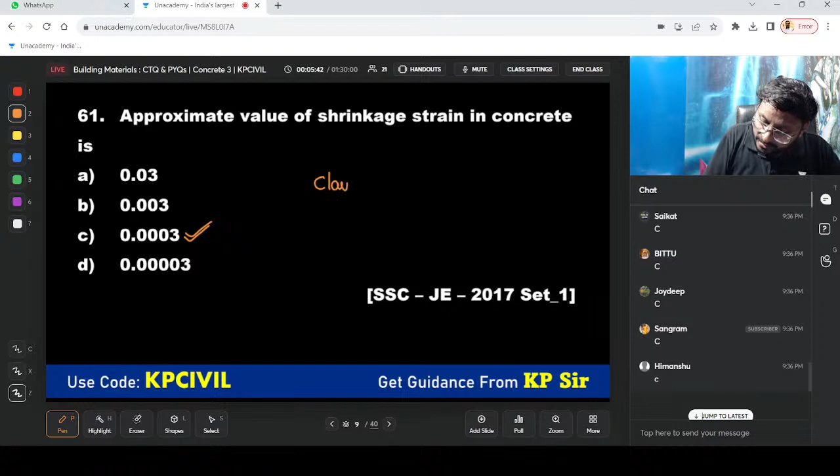So it is according to IS 456:2000, clause 6.2.4.1. If we don't have any data, then approximate value of shrinkage strain is 0.0003, 3 zeros after decimal and 3. When we don't have any test data, no other information, no test information, in such a case we take this as 0.0003. It is according to IS 456:2000, 6.2.4.1. Chalo.

Which one of the following properties of a plastic concrete is modified by air entraining agents? Kalyan garu, check once. Kalyan ji, Prashant, very good. Prashant, nice. Nalin, please go through this. Sanket garu, check karo aapka answer. Arey Jaideep, very good. Sangu bhai, kya ho gaya aapko bhi? All the above, no? All options are correct, we can say.

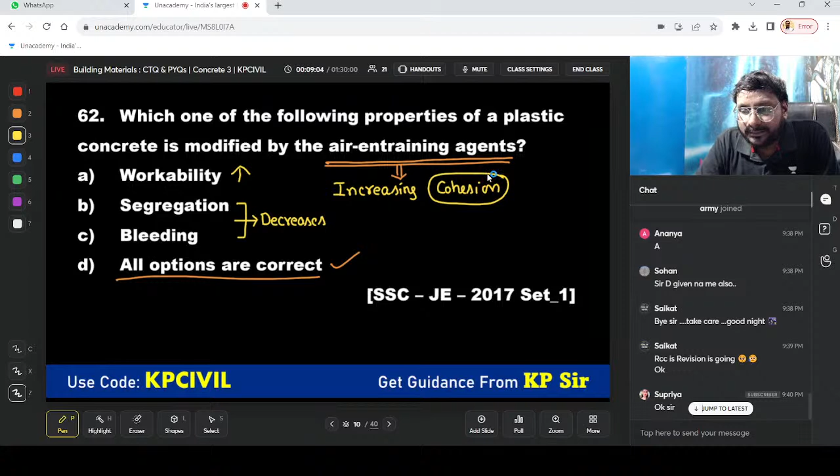A concrete in which dry coarse aggregates are first packed to have the...

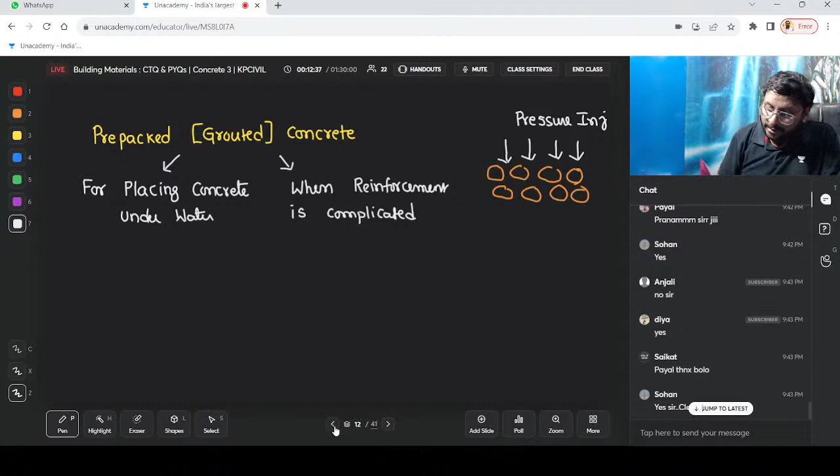Grouted concrete. Then what is coming next? What is vacuum concrete? Did you know vacuum concrete? Prashant? What happened, Messi? Bye bye.

So we will remove excess water from the concrete. The concrete in which excess water is removed by using mats, floats, vacuum foam, pads is called vacuum concrete. Yes, vacuum pressure, vacuum pads, vacuum mats are used. Excess water we can take out. That is called vacuum concrete.

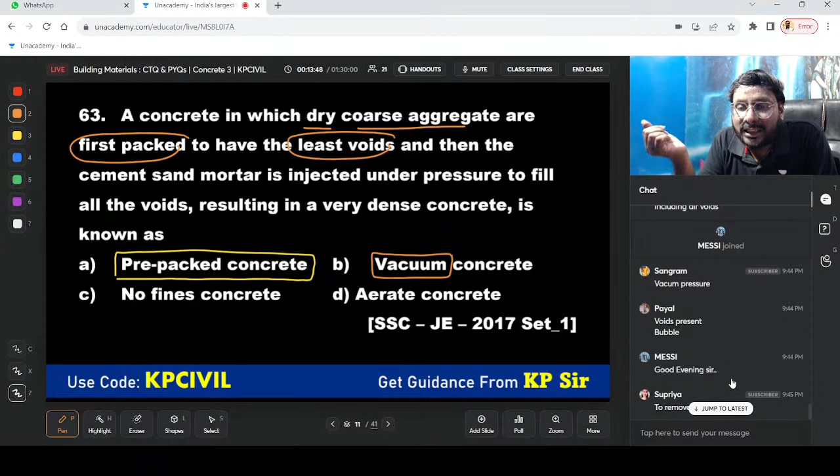Understand? Vacuum concrete is the concrete in which excess water is removed. Water will come out. How? Put vacuum mats, vacuum pads, and foams to improve the strength. To increase strength.

No fines concrete: concrete without fine aggregate. Very lightweight concrete. Not to remove voids, Supriya, please understand. In vacuum concrete, we remove excess water, not voids. And without fine aggregate, we call it no fines concrete.

Then aerated concrete, again lightweight. We can introduce air or gases into a slurry of PPC. That is aerated concrete. Do you understand?

So you know the four. Messi garu, you can say it. First, pre-packed concrete is grouted concrete: you are forcibly sending cement and sand mortar under pressure injection. Vacuum concrete, you are removing excess water. No fines concrete, without fine aggregate. Aerated concrete, you inject air.

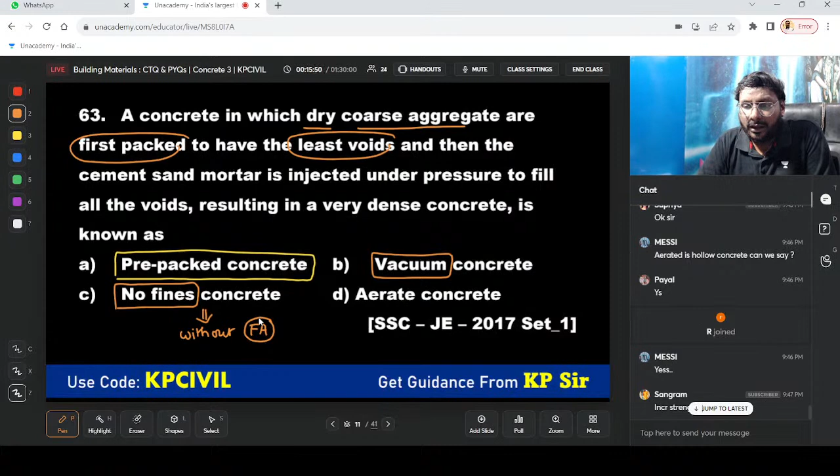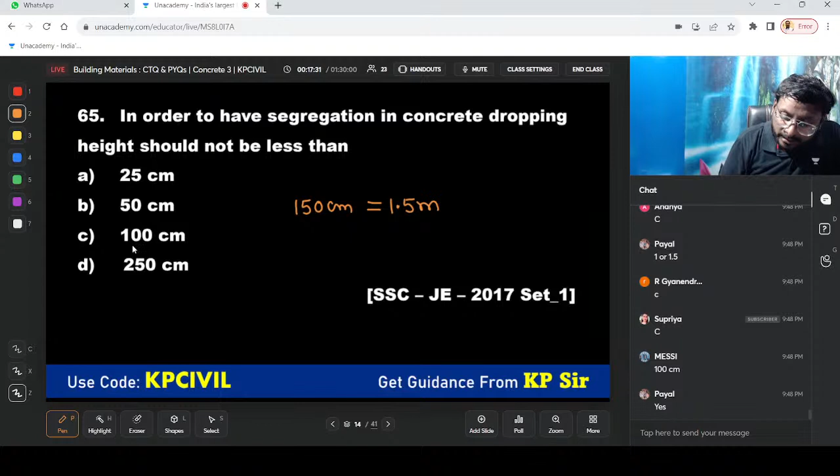Yes, actually it is 150 centimeter, 1.5 meter, but a nearby option we can select. I told in the beginning itself, Sangram.

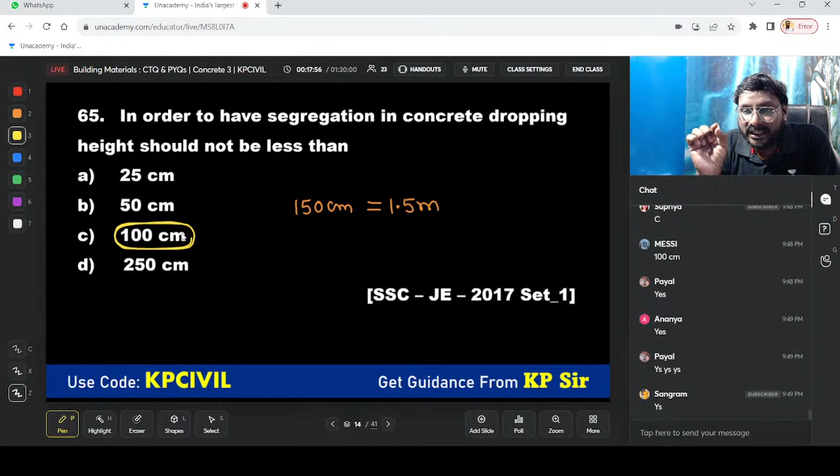That is very very important for us. So that is 100 centimeter which is nearby to 150 centimeter; that is 100 centimeter you can take.

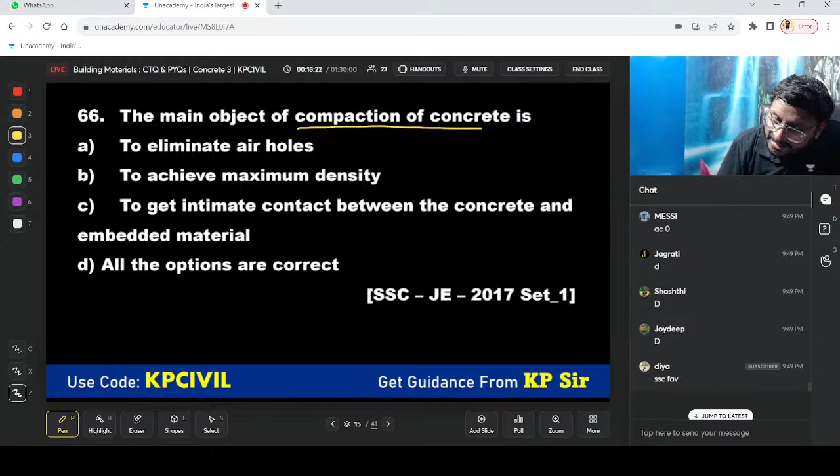What is the main objective of compaction of concrete? So compaction of concrete, we call it as self-compacting concrete, SCC. You know SCC? Self-compacting concrete eliminates air holes, achieves maximum density.

Intimate contact between concrete and embedded material. Concrete and embedded material, both must be in intimate contact. Option D. No, it is not valid, Messi garu. Not AC 0, not possible in concrete.

Chalo. So, what is the target benefit of self-compacting? Improve the constructability. If you are making self-compacting concrete, it improves the constructability and causes superior strength and durability. Constructability ज़्यादा हो जाएगा, strength बढ़ जाएगा, durability also along with strength. Generally, if you are increasing strength, there is a possibility to reduce durability. But it is not happening here. Strength increases, durability also increasing. So that is very important.

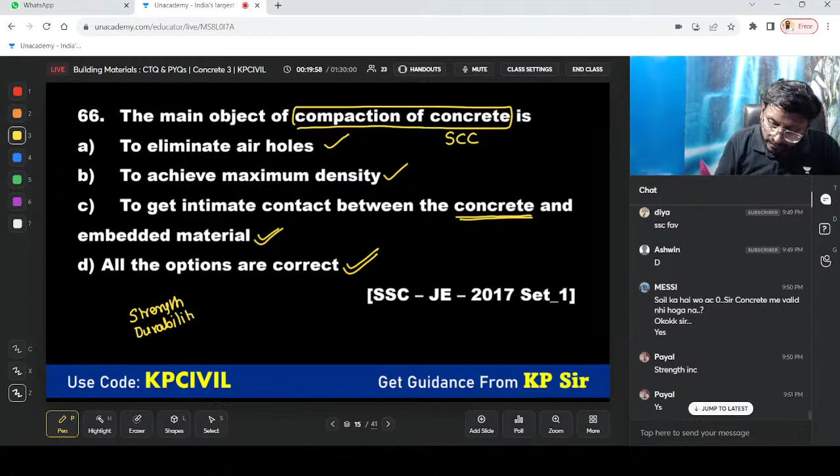Strength, durability, constructability. All are increasing because of self-compacting concrete.

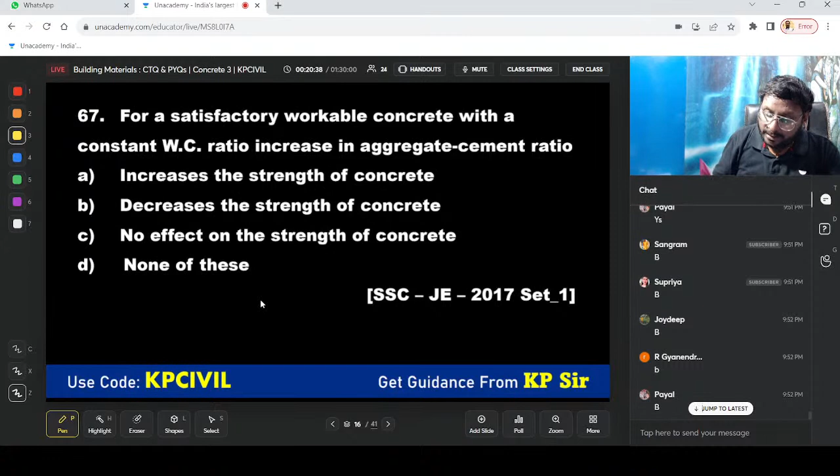For a satisfactory workable concrete with a constant water cement ratio, increase in aggregate cement ratio. Water cement ratio increases, strength decreases. Aggregate cement ratio increases, again strength decreases. Both possible. Yes, water cement ratio increases, strength decreases.

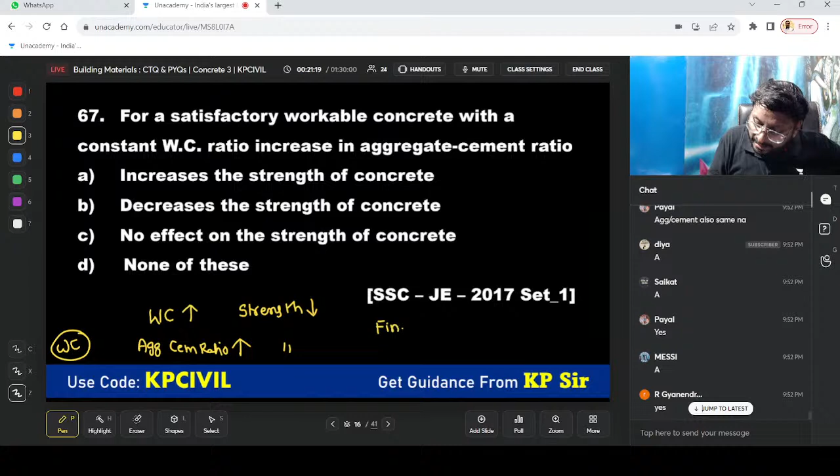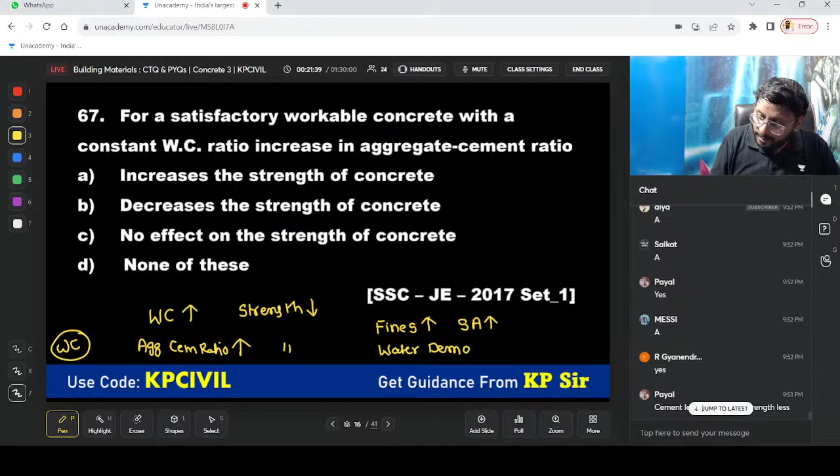Water cement ratio you kept constant. Aggregate cement ratio increase karo, ultimately strength decreases only. Why? What is the reason? When aggregate cement ratio increases, percentage of fines increases. When fines increase, surface area increases. When surface area increases, water demand increases. Please understand this.

Aggregate cement ratio increases, cement less, bonding less, strength less, that is okay. That is general words. That can be told by a mason. Hamali wala bolega, Payal garu. As a technical civil engineer, you can't say that. You can say aggregate cement ratio increases, percentage of fines increases, surface area increases, water demand increases. As water demand increases, ultimately strength decreases. Like that only you can say as a technical person. Don't say like a mason.

Chalo beta. Understand? Kalyan garu, Madhuri. Chalo, we'll move on, guys. This is we know already.

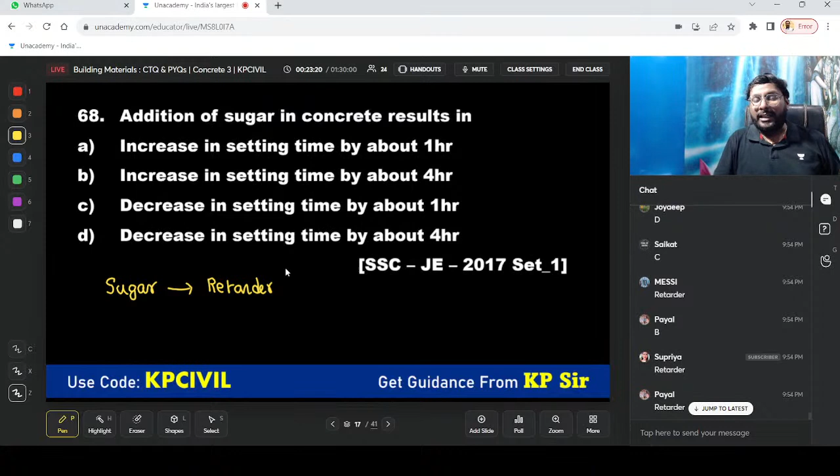Addition of sugar in concrete results in? Concrete में sugar add होने के बाद क्या हो जाएगा? So we know sugar is a retarder. It retards the chemical reaction, hydration of cement. So it increases setting time. Retarder, delay reaction.

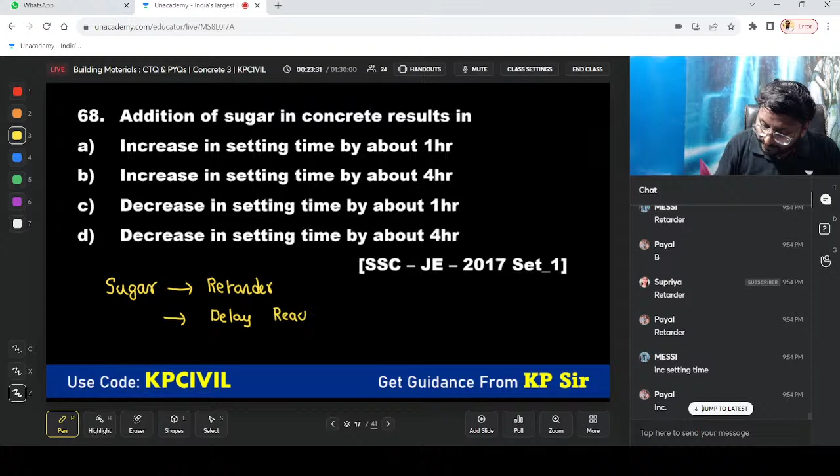So setting time increases. But how many hours does setting time increase? About 4 hours.

What happened, Joydeep garu? That is for you only. I have written that. It is not A, it is B. 4 hours increases. Bhaskar, Prashant Kumar, technical blogger. 4 hours increases. Chalo.

Sugar is a retarder. Retards the chemical reaction. Rate of chemical reaction falls down. Delays the reaction rate. Setting time increases. ये बताओ.

Same, Mantosh garu also saying, Payal. Mantosh also saying same. अरे क्या हो गया?

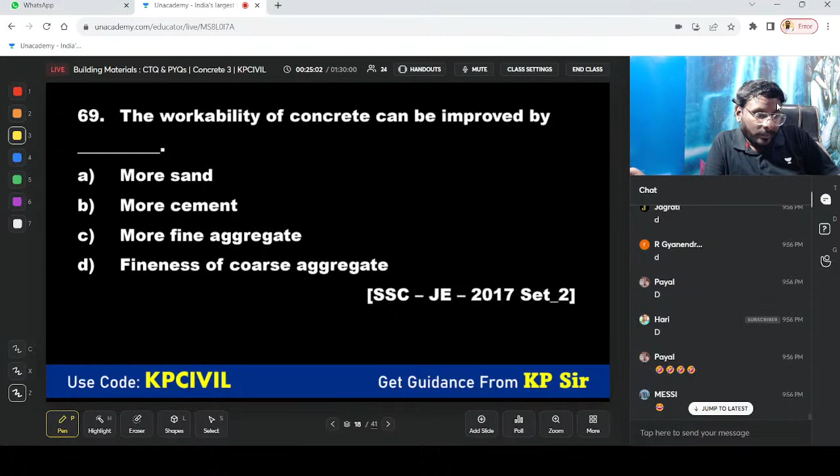Workability of concrete can be improved by? So it is not about cement. Please understand first, you are answering the question related to concrete. How many of you know this? Workability of concrete, not for cement.

So why not more cement? Please tell me. With increase of cement, will concrete workability not increase? Tell me, guys. What happens if I say workability of concrete is improved by more cement?

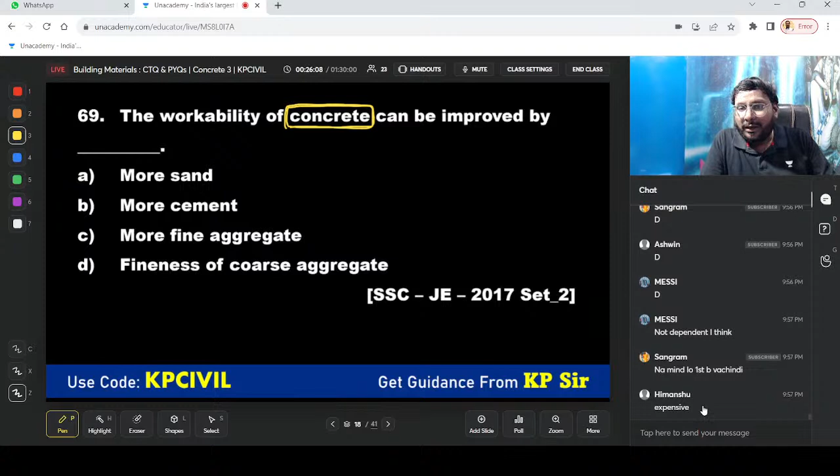What is workability? Workability is the ease with which it is working. The ease of working. Yes. No, we are not talking about cost, Himanshu. Ease to work improve हो जाएगा ना हो जाएगा, बस ये बताओ. Only you tell me that. We are not worrying about cost. So more cement, ease of working will be more. Then more cement only. We are not at all talking about the remaining properties. So workability, ease of working, will be more possible if you take more cement.

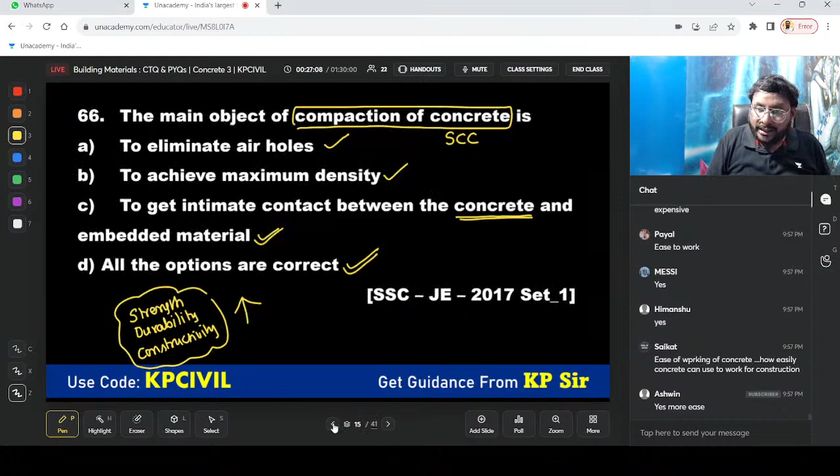If fineness is increasing, please understand. Fineness of coarse aggregate is increasing. You do understand that property. Fineness of coarse aggregate increases, surface area increases, water demand increases, it becomes more slurry. Please understand, we have written it already here. Fines increase, surface area increases, water demand increases, more water is taken. If it takes more water, it will become more slurry, na? Understand that point. So that is why we are saying more cement.

Strength of concrete increases with... Concrete strength.

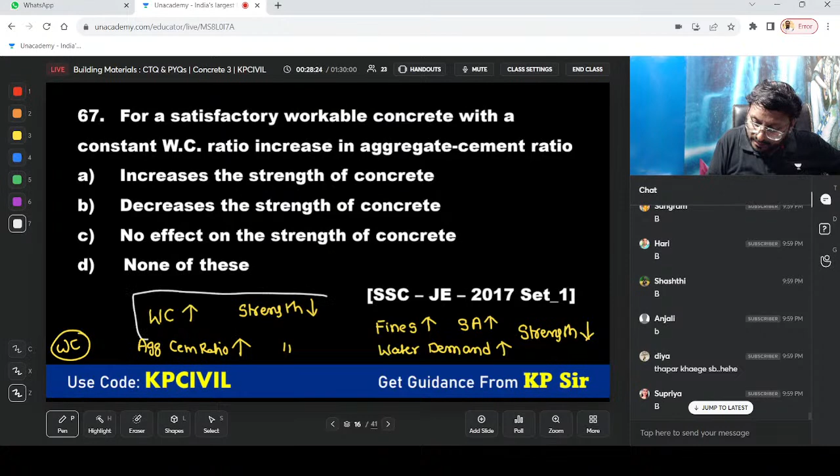Water cement ratio increases. What happened to strength? Strength decreases. Just now written ना.

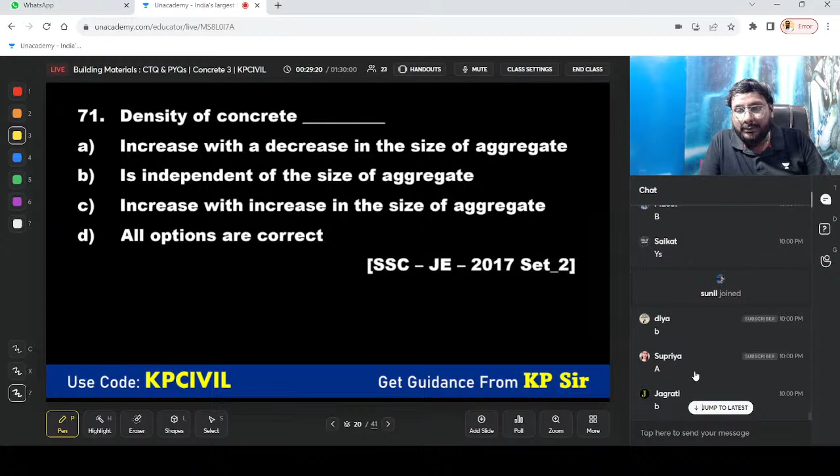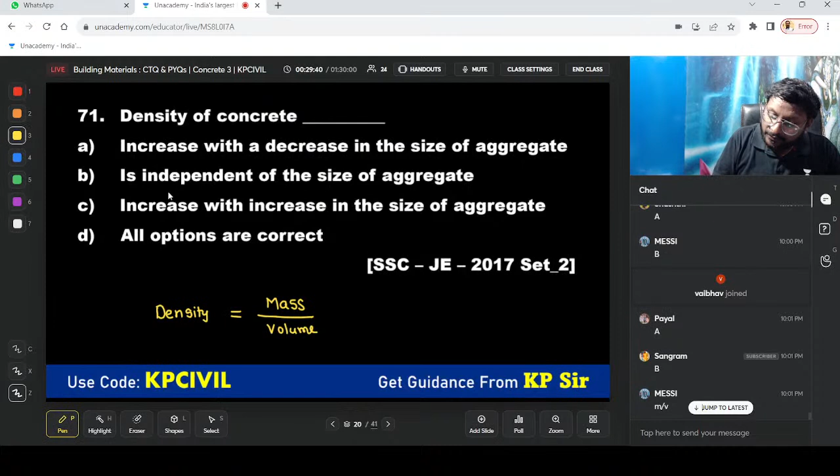Density is equal to, this is a simple relation na? Mass by volume. Size of aggregate increased, volume increased, na? Sangu bhai, size of aggregate increased, volume increased. Size of aggregate decreased, volume decreased. So density is inversely proportional to volume. Size we will consider in terms of volume. So density increases with a decrease in size of aggregate. Small things and known things. Everyone knows this formula.

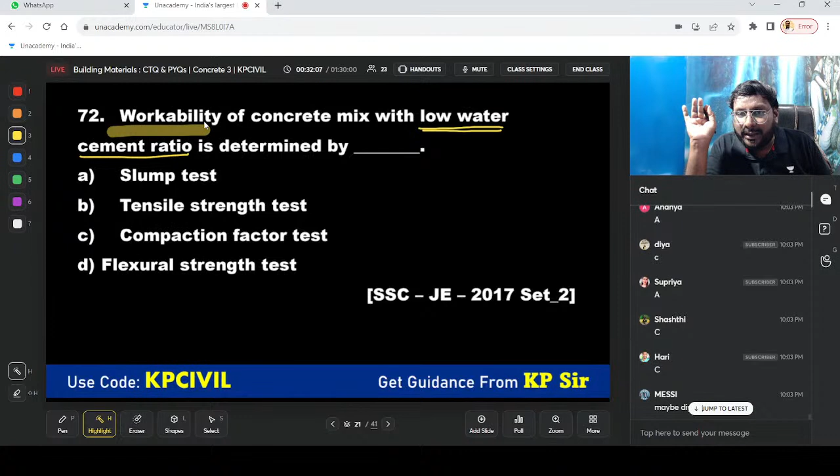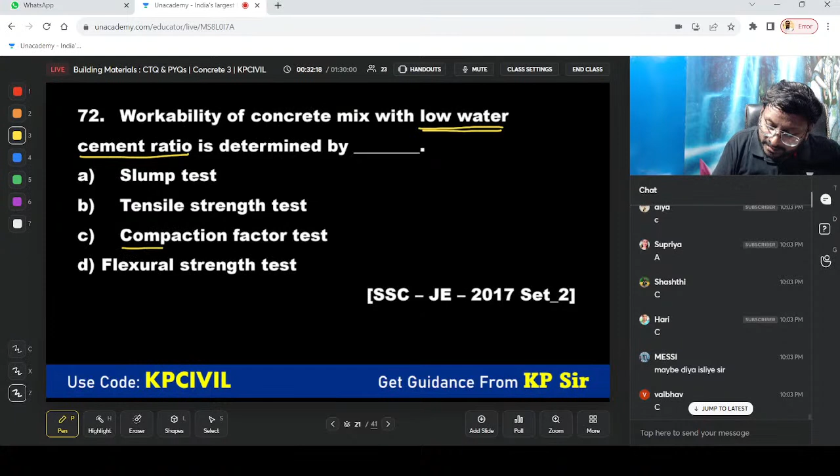But they are asking workability, very good Hari, with respect to low water cement ratio concrete mix. Understand? Compaction factor test. Compaction factor test for low water cement ratio. हाँ, correct. Kattigaru, after I say the answer, you are giving explanation.

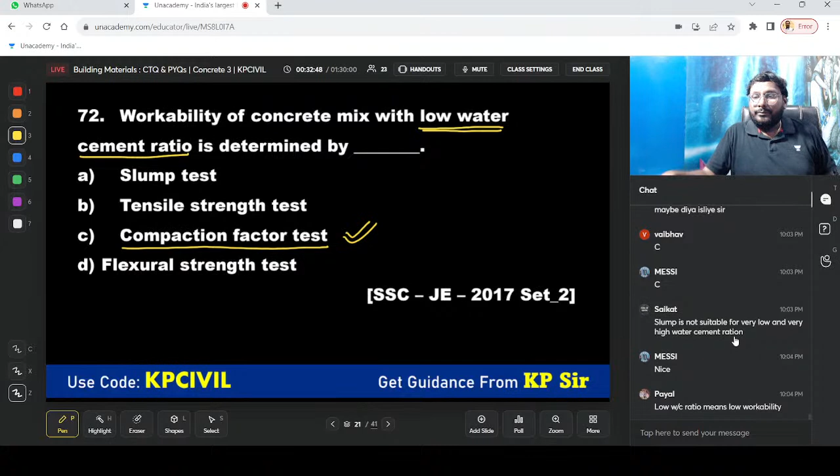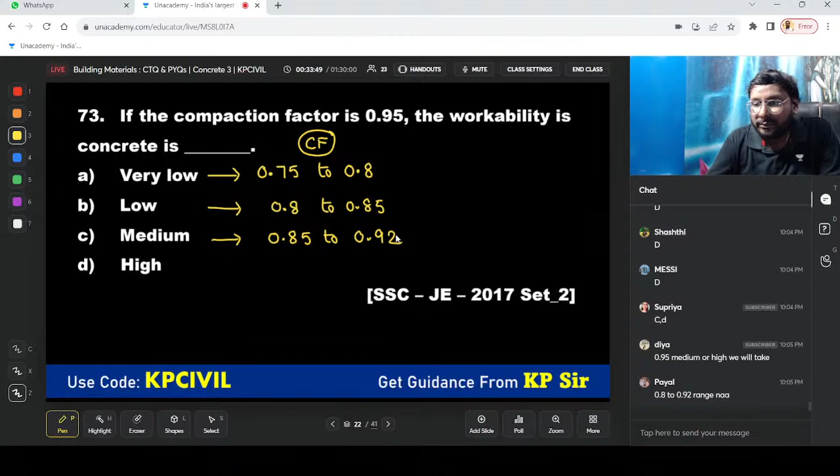If compaction factor is 0.95, workability of concrete is, अभी आएगा देखो पायल मैडम. Workability of concrete is very low, compaction factor 0.75 to 0.8. Workability is low, 0.8 to 0.85. Workability is medium, 0.85 to 0.92. Yes, 0.92. Then greater than 0.92.

Understand, Supriya, it is not 0.95. It is 0.92 only, the range. Supriya and Diya Garu, 0.95 is not medium range. 0.92 only is medium range. So what is the answer now? Answer is high. Answer is high.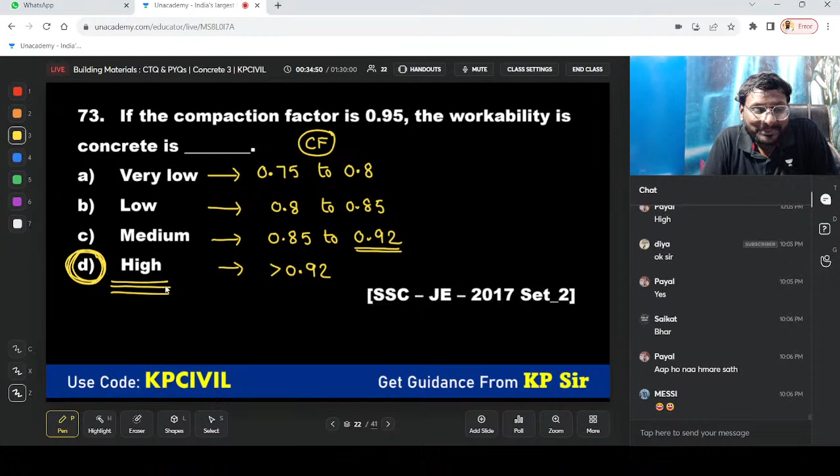Which of the following proportion of the ingredients of concrete mix is not in conformation to arbitrary method of proportioning? Which is not used? We can take 1:1:2, 1:2:4, 1:3:6, 1:4:8.

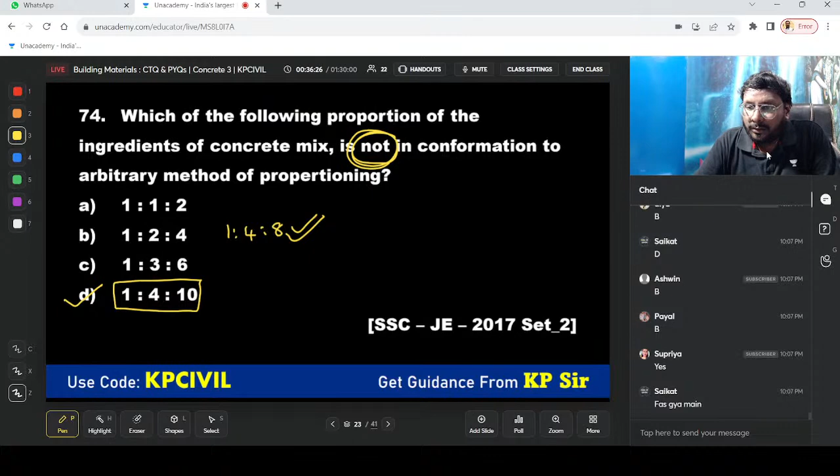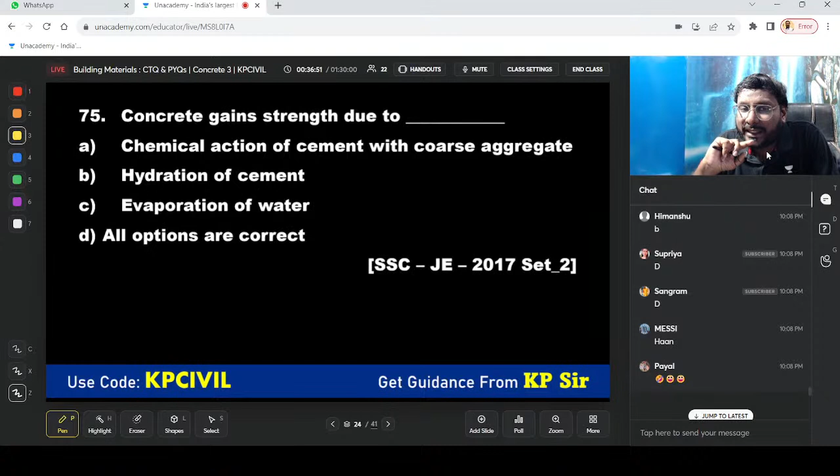Concrete gains strength due to... previous one required. Supriya, this one required. Concrete gains strength due to. Whenever we have the option of all the above, immediately we attract to it. That is SSC JE favorite option. But don't go for it. Please understand, don't go for it. It is for hydration of cement. Concrete gains strength due to chemical reaction between water and cement, hydration of cement.

Hari, you are not coming to plus class. I have not seen you, Hari, in the plus class. What happened?

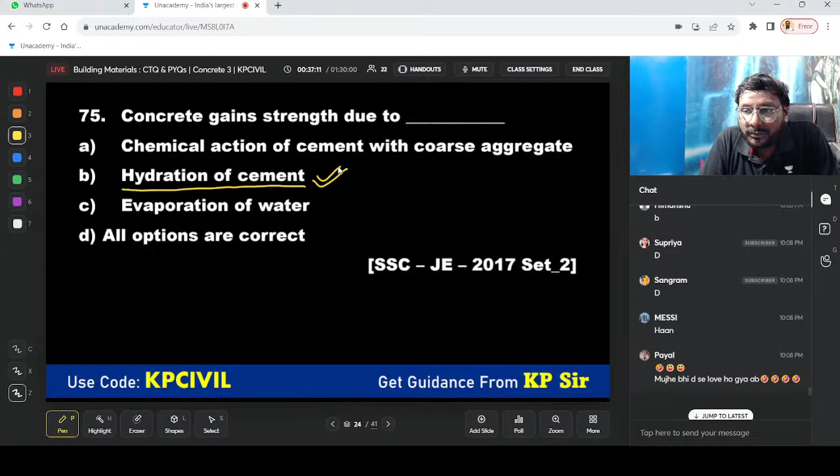So it is because of hydration of cement. Chalo. Maximum shrinkage takes place in concrete after drying for. Maximum shrinkage, not strength. Please understand this. Maximum shrinkage they are asking.

Babu, कहाँ है संगू भाई? कहाँ है बेटा? हाँ, ये is for strength. That is what I shouted. Saikat garu, ये is for strength. We are not talking about strength. We are talking about... election work, resurvey. So which area you are working, Hari?

So this is 1 year, maximum shrinkage they are talking, na? So this is 1 year. 1 year you can take maximum shrinkage. Maximum shrinkage 1 year.

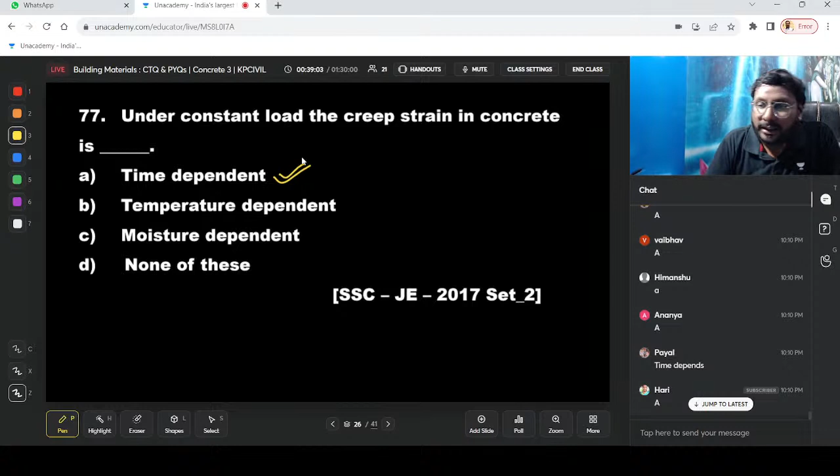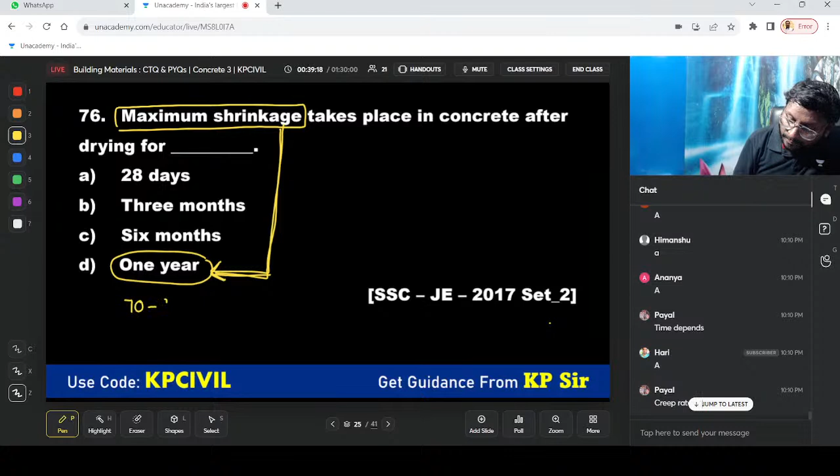Only you get negative marking because of 3 months. Under constant load, the creep strain in concrete is time dependent only, na? Creep strain is time dependent, no doubt about it. And what is the maximum strength happened in this 1 year value? You can take around 70 to 80%. Tappad milega.

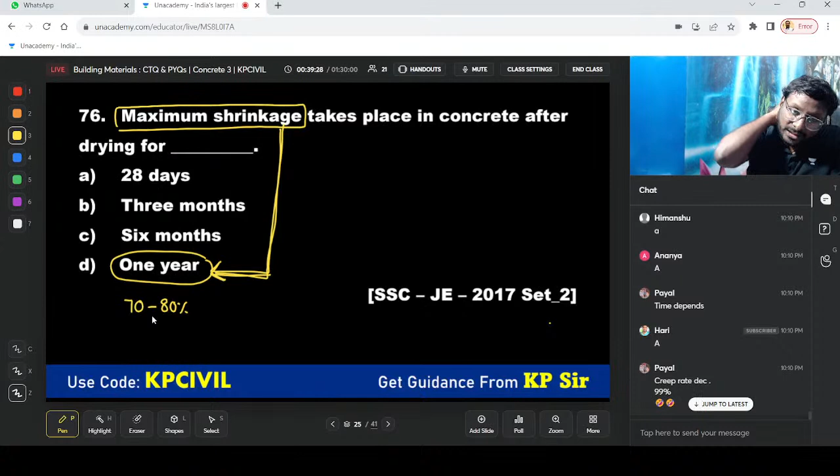Shrinkage, sorry. Maximum shrinkage, not strength. 70 to 80% shrinkage बोल रहे. 1 year में 70 to 80% shrinkage बोल रहे. Strength नहीं बेटा, shrinkage बोल रहे. 70 to 80% shrinkage.

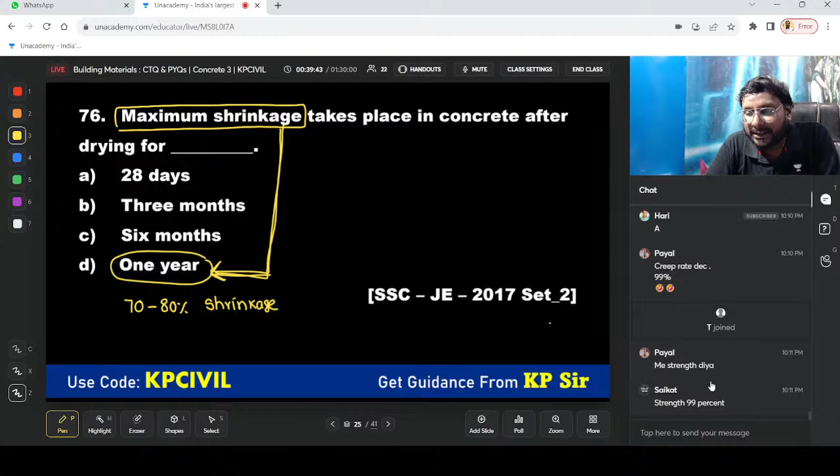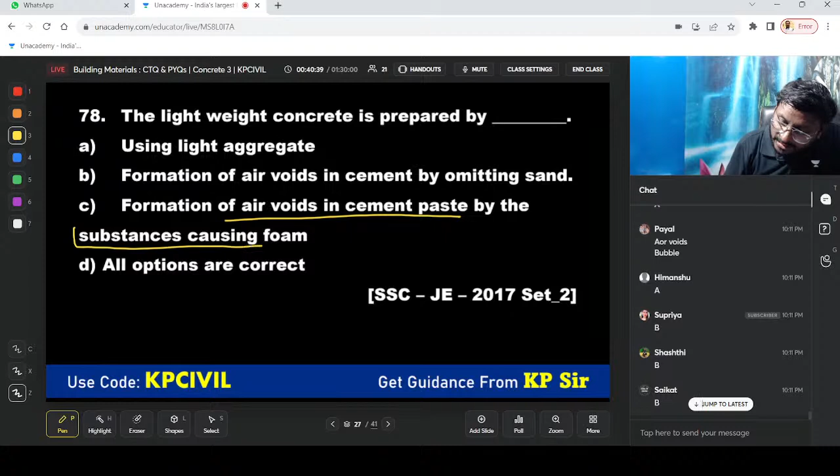Omitting means eliminating. Are you eliminating the sand? You are creating air voids by omitting sand. Omitting means removing, eliminating. थोड़ा इंग्लिश आना चाहिए इधर. So we are not eliminating sand, na? So formation of air voids in cement paste by substances causing foam. We can focus on it.

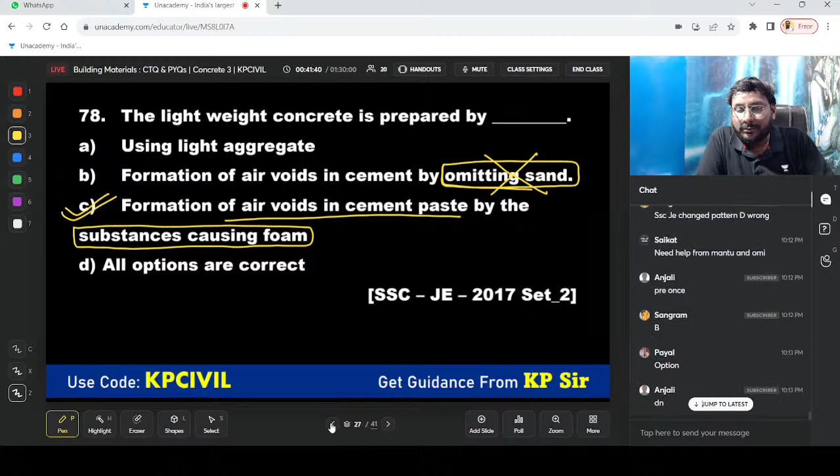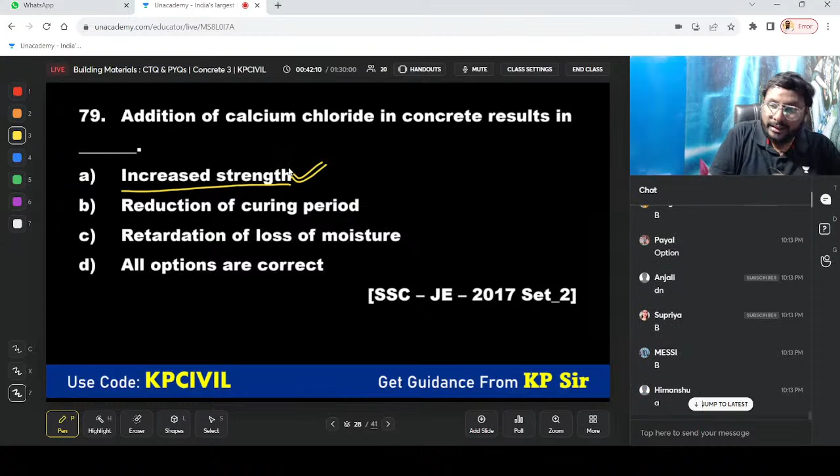Calcium chloride, favorite question. Payal garu ka favorite question. Done. Chalo. Addition of calcium chloride in concrete results in. Calcium chloride increased strength. When you take extra RHC, it can gain 25% strength. In extra RHC you are taking calcium chloride. Extra RHC gains 25% strength more than RHC. So we are adding some 2% of calcium chloride in extra rapid hardening cement. 25% of strength is more.

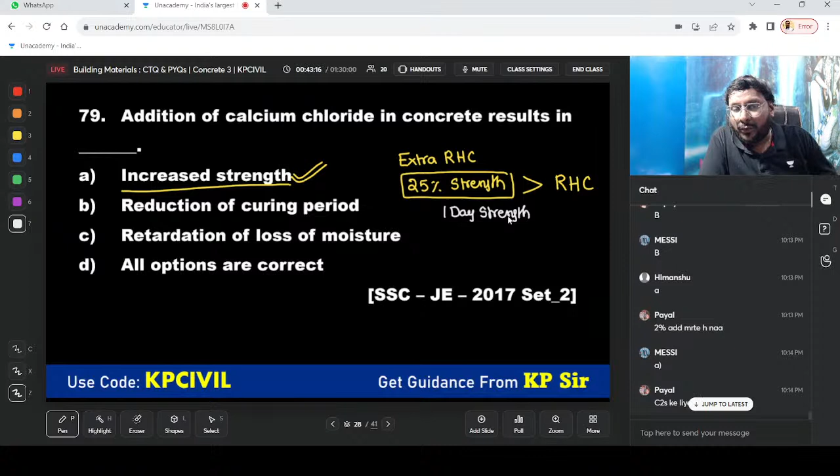25% of strength in how many days? In how many days is this happening? 1 day. Only 1 day. Please understand, 1 day strength is increasing by 25%. So focus on it. Too wet concrete may cause.

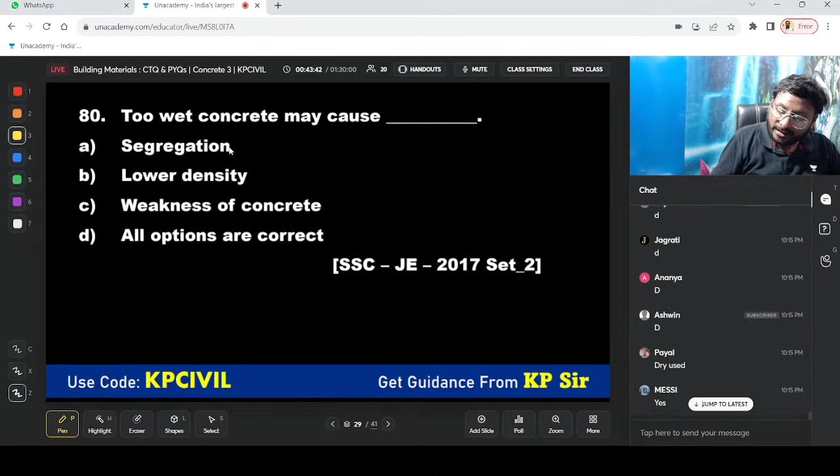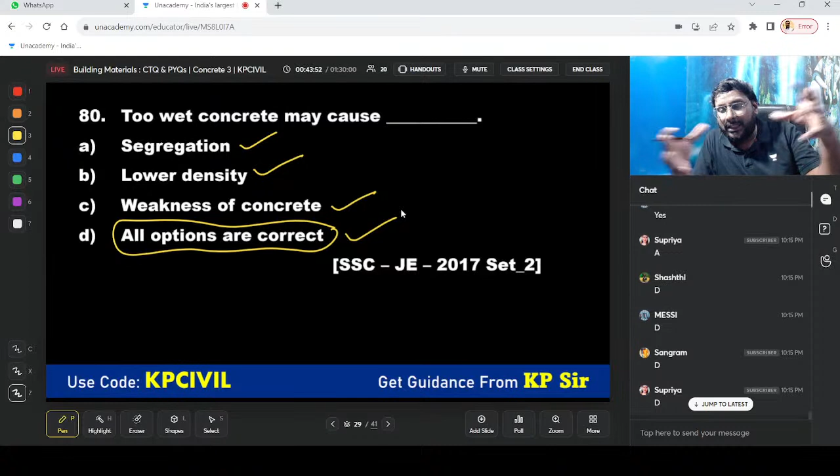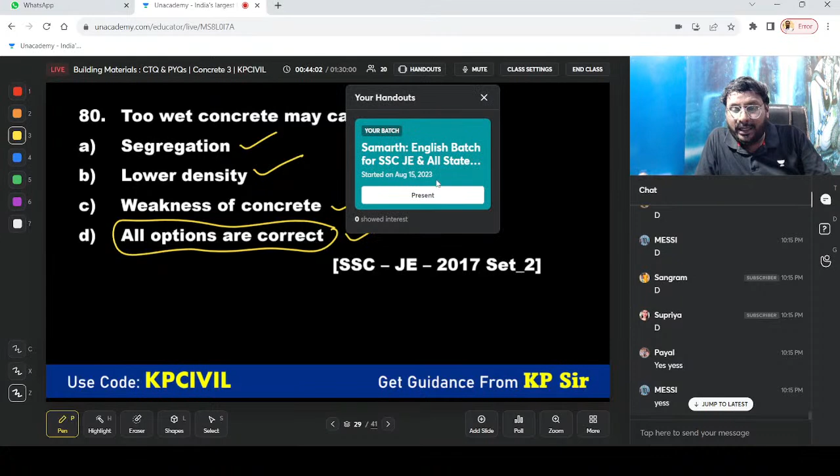Now we are doubting whether to give SSC JE favorite option or not. Yes, too wet concrete will cause segregation, lower density, weakness - all of the above are possible. Too wet concrete particles will be separated from one another. Being so wet, density will reduce and strength will reduce.

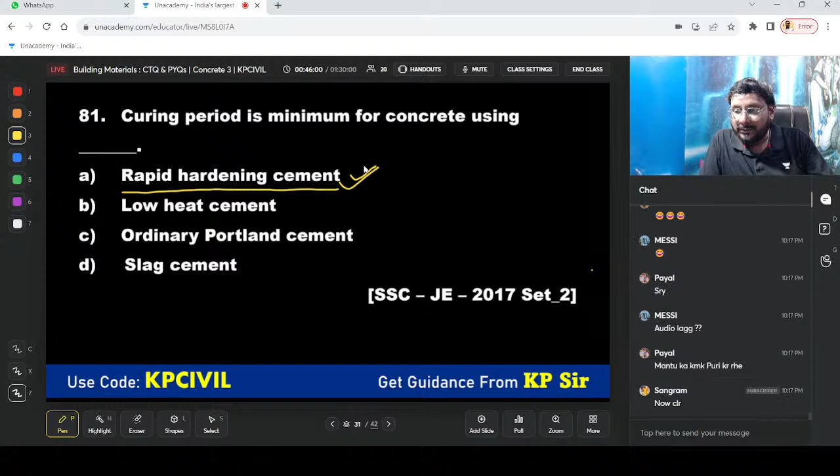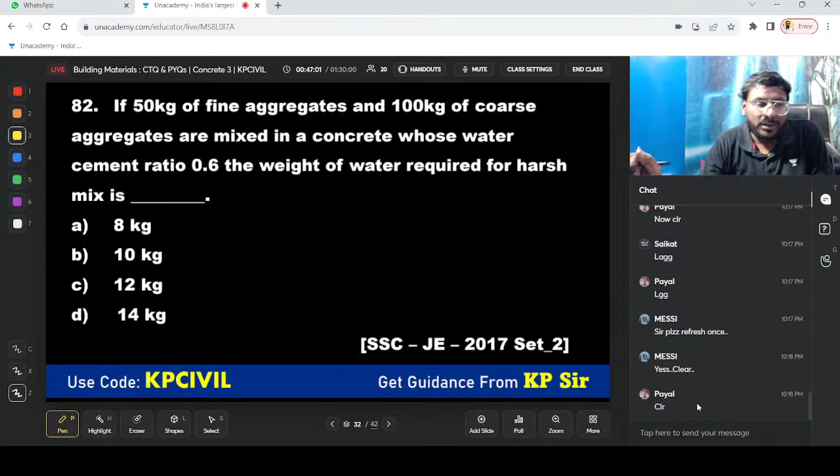Now is it clear? Please confirm once. Okay. So we are taking 50 kg fine aggregate, 50 kg fine aggregate, 100 kg coarser aggregate, then water cement ratio is 0.6.

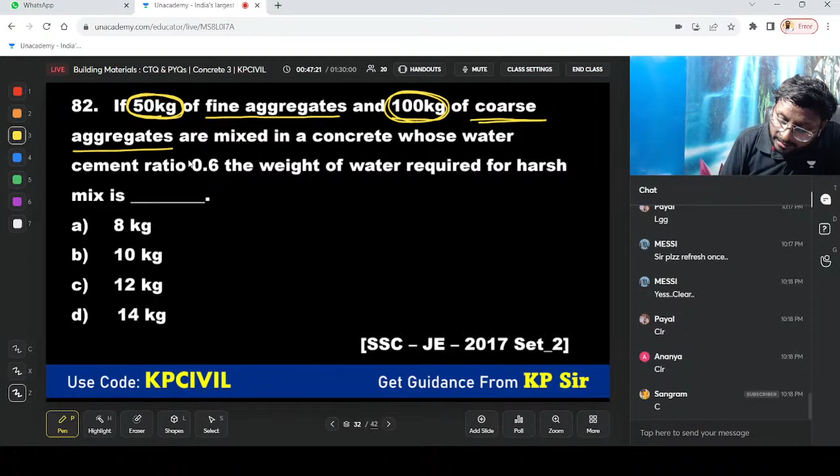Water cement ratio 0.6. Weight of water required for harsh mix - so you can take the formula. Weight of water as per harsh mix equals percentage weight of fine aggregate plus percentage weight of coarser aggregate, into water cement ratio. You know this formula, na?

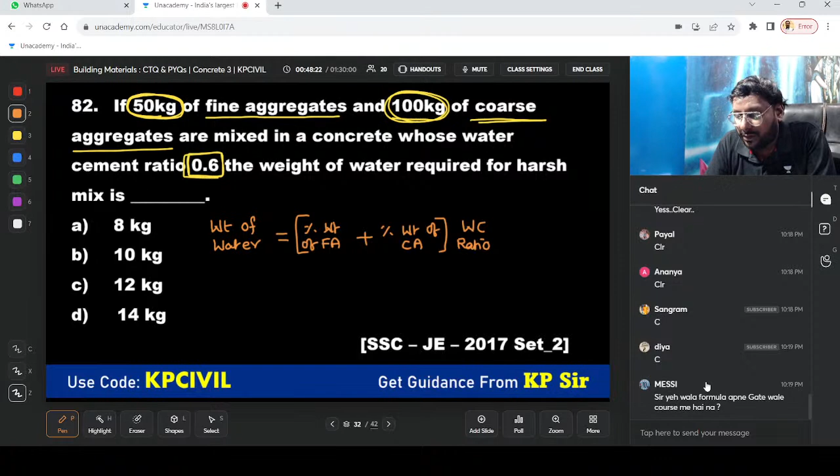Yes, it is there. Percentage weight of fine aggregate - we covered this as a GATE course. Maximum we covered in it in a very, very short time, within 12 hours maximum. I think you are observing all questions - 90% questions already covered in that course, given in the name of only a 12 hours course. From timber, from cement, from concrete, all questions are covered there.

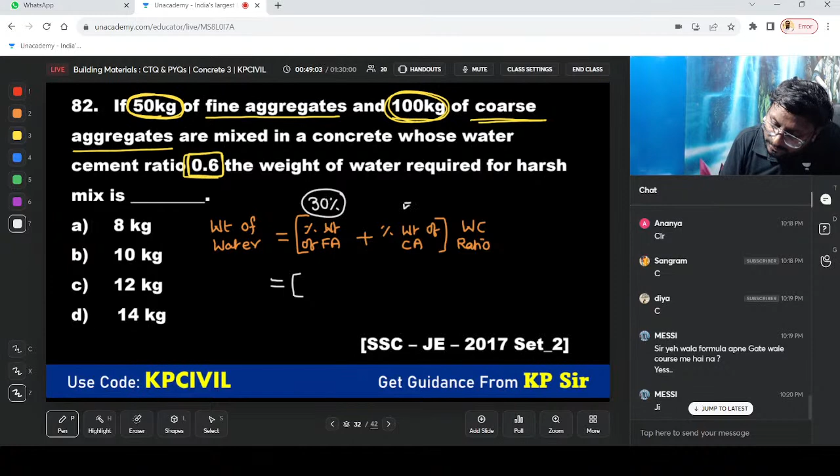So, percentage weight - what is percentage weight of fine aggregate plus percentage weight of coarser aggregate? We can take 30% weight of fine aggregate, 5% weight of coarser aggregate. These are standard values, no? 30% weight of fine aggregate, 5% weight of coarser aggregate.

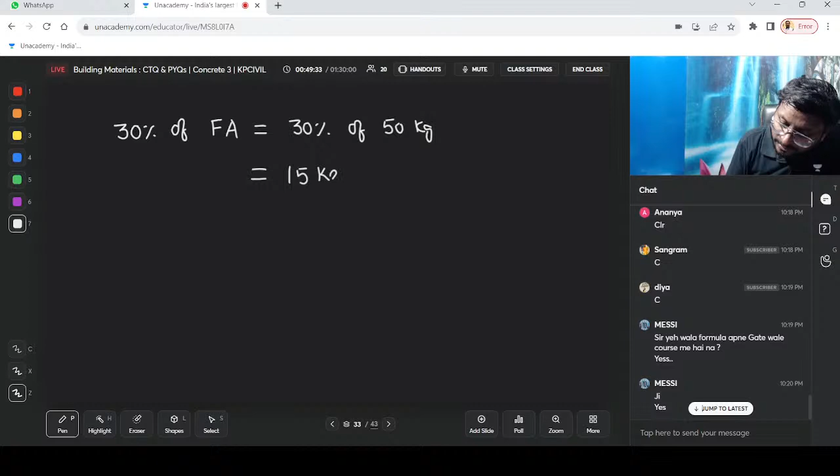30% of 50 kg - 30% of FA, 30% of 50 kg - FA is 15 kg. 5% of coarser aggregate - how many kg? 100 kg, na? 5% of 100 kg is 5 kg. So we can take here 15 plus 5, into 0.6 - 20 into 0.6 equals 12 kg.

Okay, done, everyone got the answer. Shall we move?

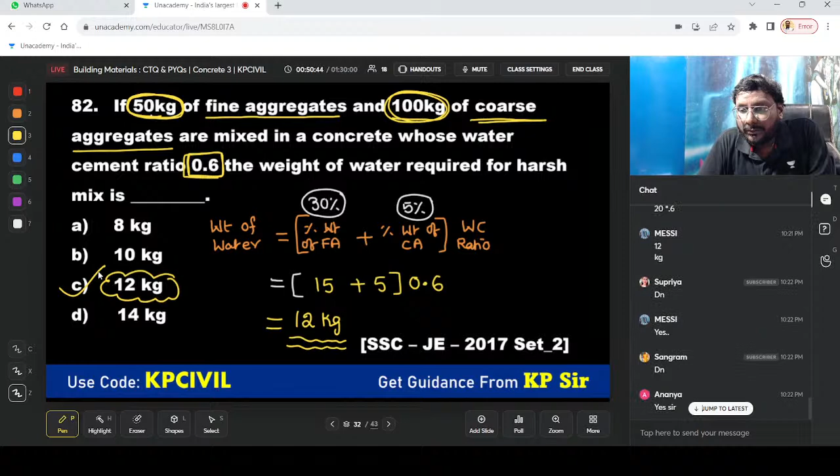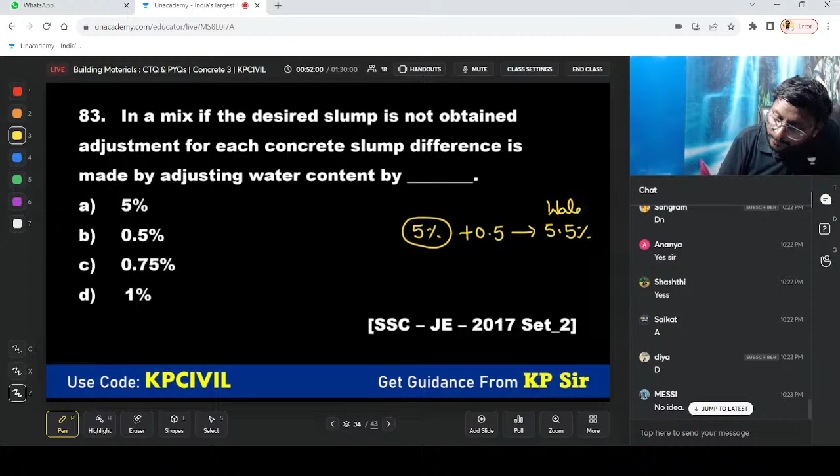No, I am saying this is the initial value. 5% is the initial value, your desired slump is not obtained. Then you can add 0.5, make it 5.5% of water. Prepare the slump with 5.5% of water. Not satisfied, then add 0.5 more to 5.5, making 6%. Prepare with 6% water, then find out the slump. Not happening, then add 0.5 more to 6. Like that you can go ahead.

Every time 0.5% is added up, Sangram Garu. I have already written it. We are not increasing all of a sudden from 5 to 10, 10 to 15, 15 to 20. So what is the question - are you understanding what the question is? What is the question, are you getting it? Okay, gradually only we are going to add, gradually every 0.5, 0.5, 0.5 added, it will work out. Gradually adding will work out. Okay.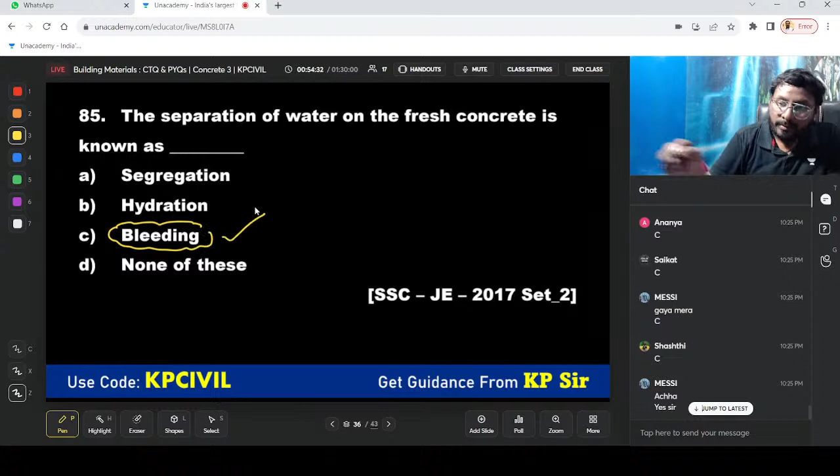Separation of water on the fresh concrete is known as what? Separation of coarser aggregate from finer aggregate is called segregation. Chemical reaction of cement with water is hydration. Separation of water on fresh concrete is called bleeding.

Cement concrete road is 1000 meter long, 8 meter wide, 15 centimeter thick, over a sub base of 10 centimeter thick gravel. Find the cubic content of concrete 1:2:4 for the road specified. They are asking for the cubic content.

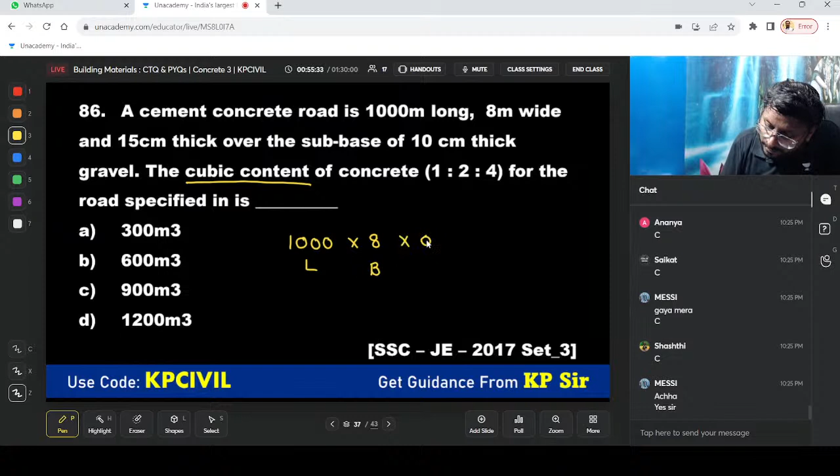Saikat, Akash Gupta, please check once. Cubic content of concrete: 1000 meter length, 8 meter width, 0.15 meter thick. So what is the value? 8000 into 0.15 equals 1200 meter cube.

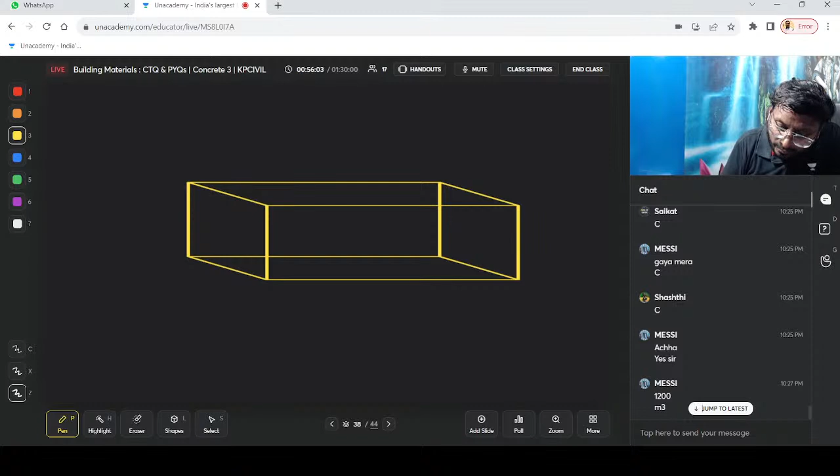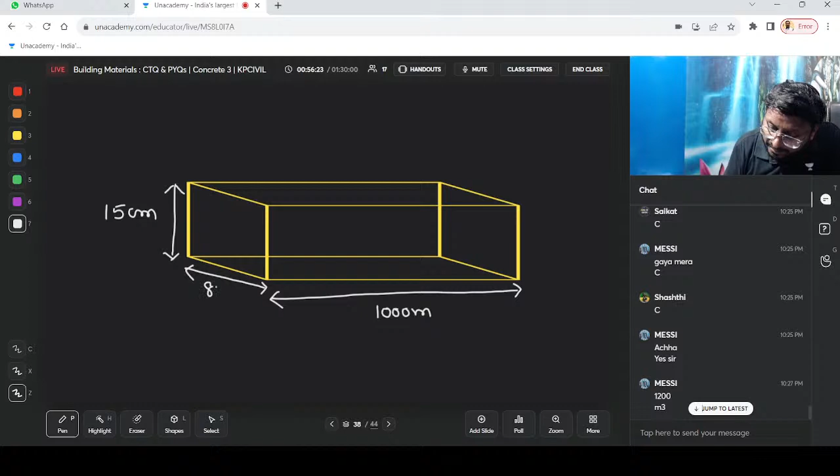Simply you need to construct this. So what are you going to focus on here? Length is mentioned, 1000 meter. Thickness is 15 centimeter. Width is 8 meter. What is the cubic content? Cubic content is nothing but volume, simply a volume: 1000 into 8 into 0.15.

Pick up the correct statement from the following. This one you require. This one or the previous one, Supriya?

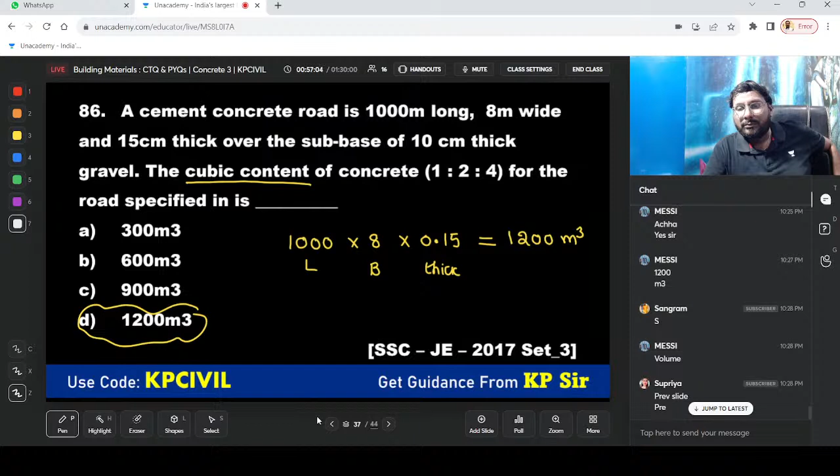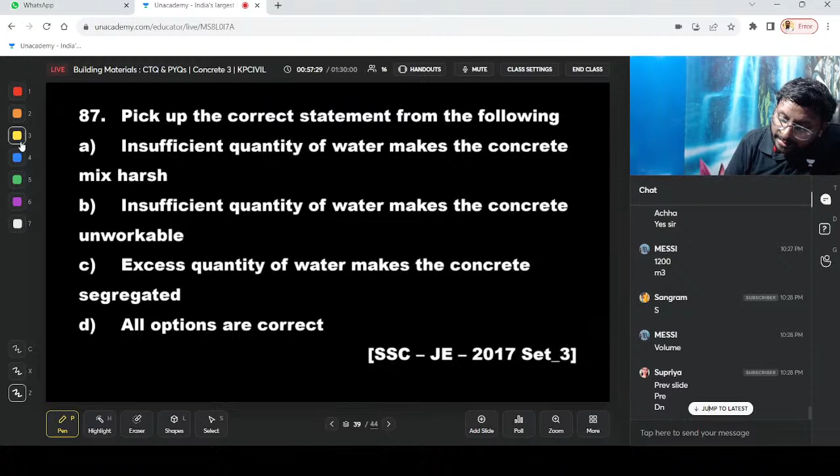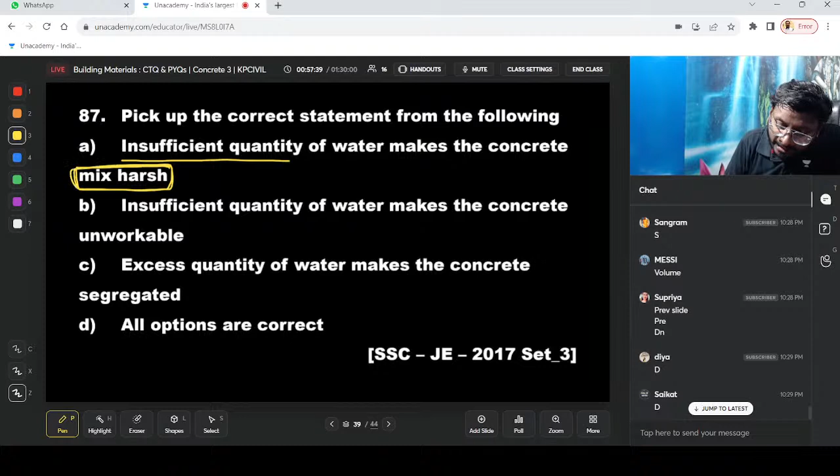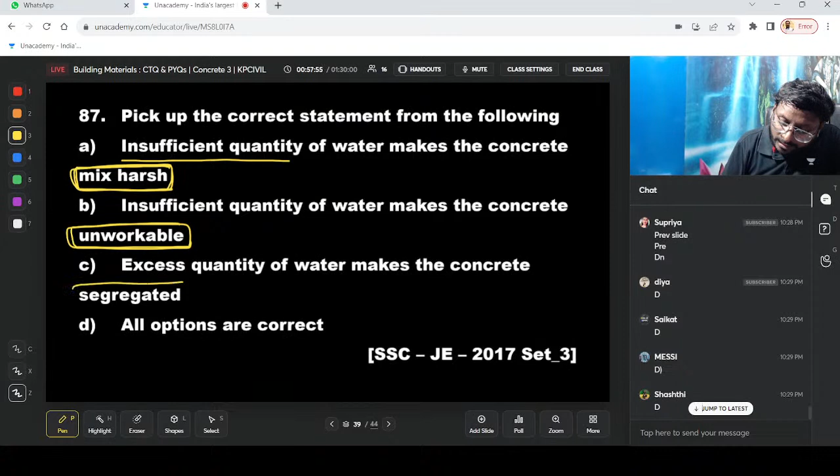Insufficient quantity of water makes concrete mix harsh and unworkable. Excess quantity of water makes concrete segregated. So insufficient water makes concrete mix harsh and unworkable, while excess water makes concrete segregated. All options are correct.

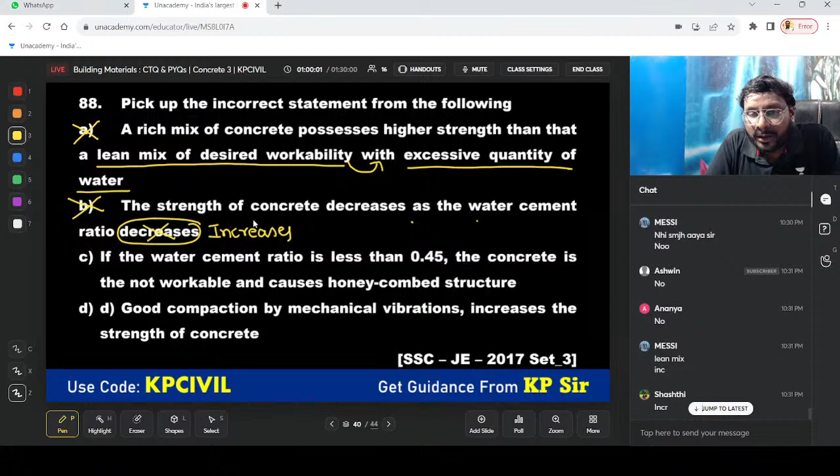Concrete is not workable, resulting in honeycomb structure - true. Good compaction by mechanical vibration - yes, we can give excellent compaction by mechanical vibration. Strength of concrete increases.